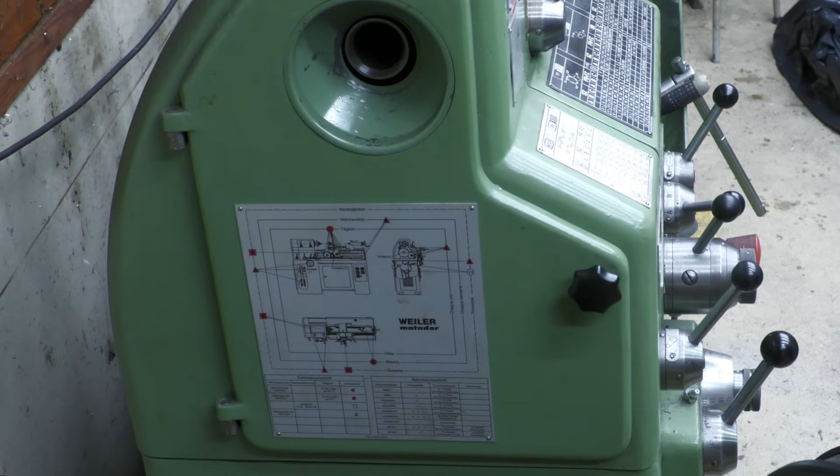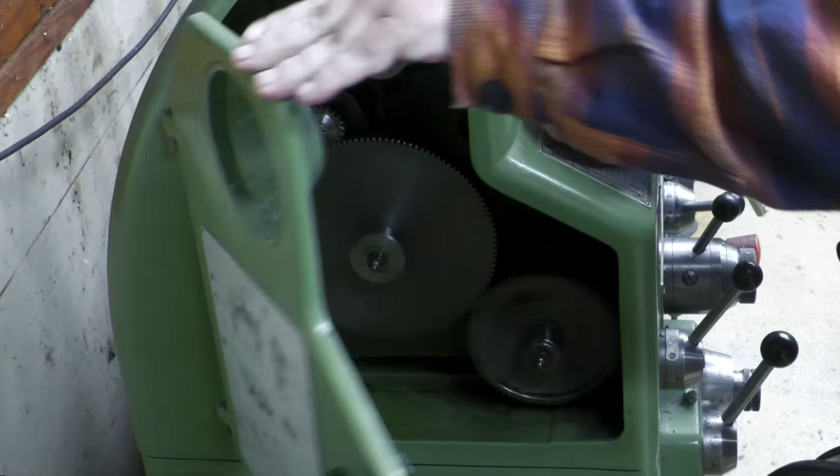Now, let's take a look inside the guts of this lathe. Well, it's a very simple thing. You just turn this knob and then you can open a door. And there you have it.

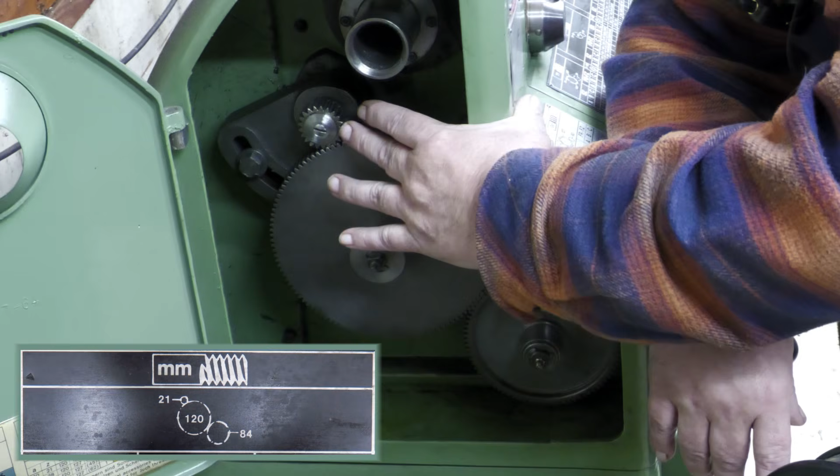At the moment we have here a gear which is 84 teeth, and this is 120, and this one is 21 teeth. And as you can see in this table here, there is a table down there, we should have 28 teeth gear here up, which I have here, and then we should have here 72 teeth gear, which I have here.

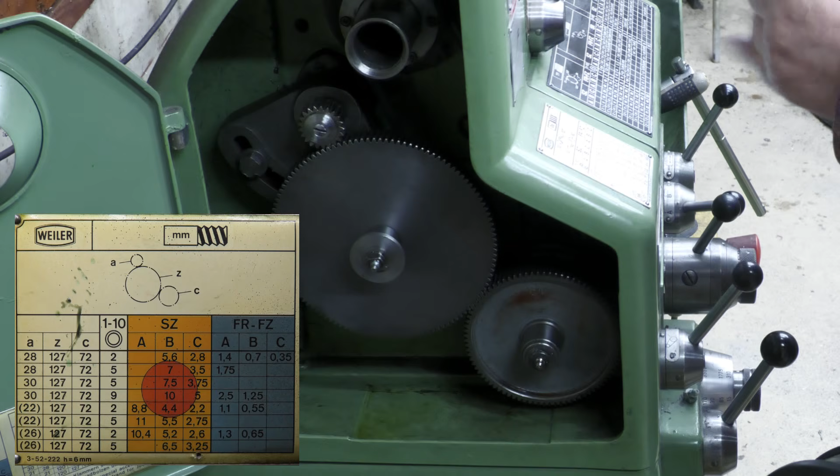So, and yes, this I bought. It was, the gear was ready, but the hole was not - it was 16 millimeters. I had to bore it to 22 millimeters. It didn't have a keyway, and now it does.

Okay. So, the first thing, of course, is to try to start to remove these things. And in order to get this right, I believe I need to... no, I don't need to remove this, only that one here. So, let's see now. So, there is a screw.

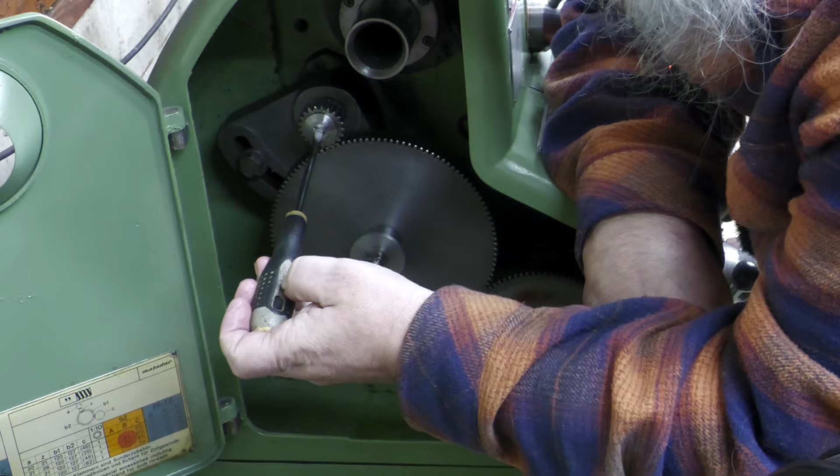But this thing, this one, there is a surprise inside. There is a fuse, and you should be really careful when you are dealing with this one, not to drop anything to the floor, for example.

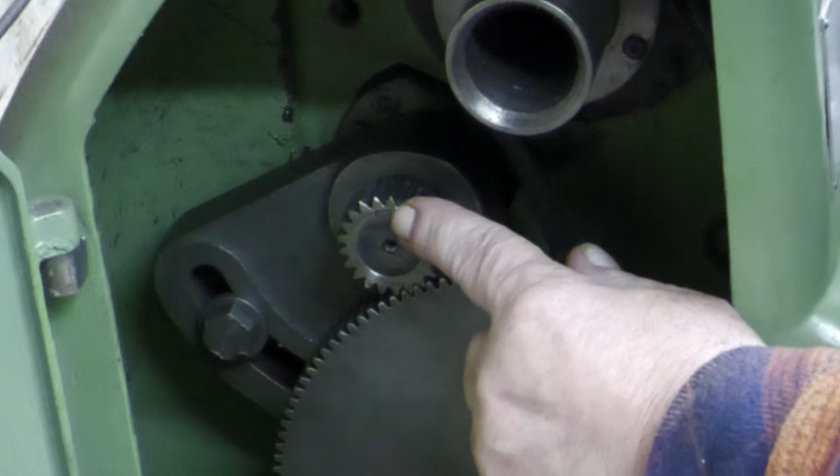Okay, and now I should also have, yeah, I wipe these clean as I go. There is a keyway. If you look carefully, you might see it. And now if I pull this gear out from here, it stays up.

And this is of course the wrong gear. This is the 21 tooth gear, which I don't need. I need a 28 tooth gear here. So, but the key here is very, very special.

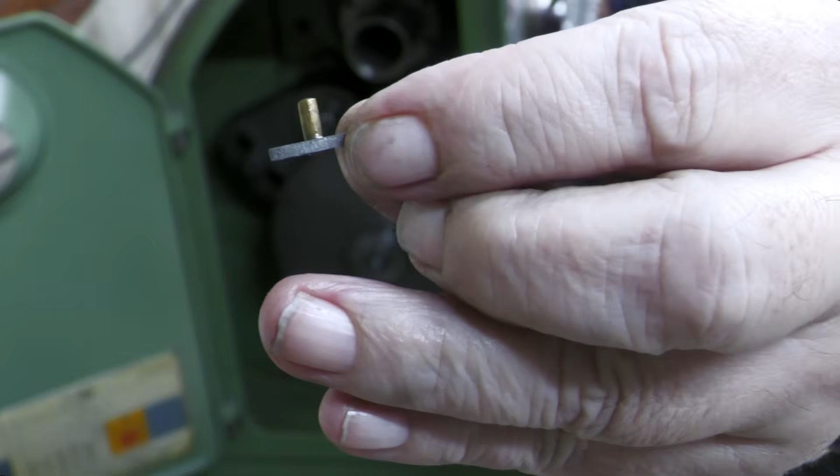When you remove it like this, you probably notice - I will show it nearer to the camera so that you can see - there is this little thing poking off. It's made of brass, and this is actually a fuse. You should be careful, this is very easy to drop off that one. So now we have like this.

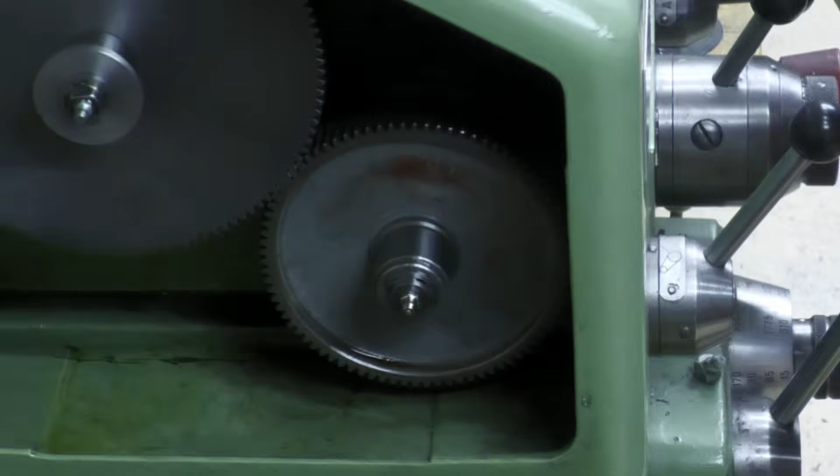And we should also change that one. So we need to take away - there is a C-clip here.

This should come out quite easily. Yeah, they come out easily. You just have to be careful so they don't fly around when they pop off. Okay, it's out.

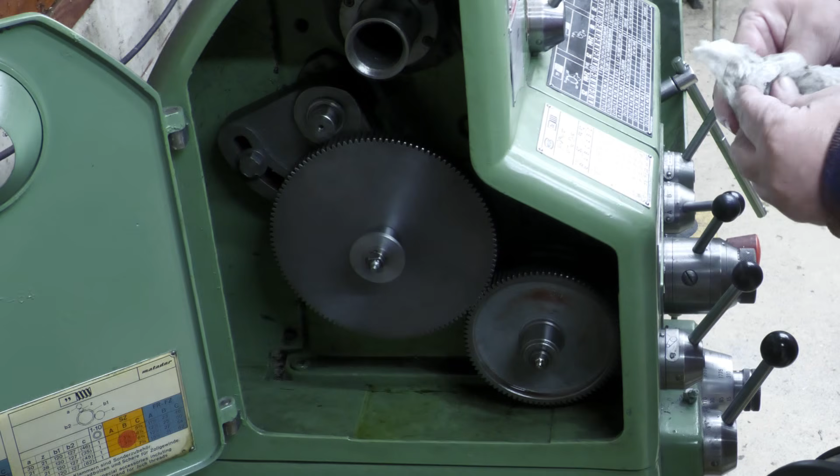And next bit is this. Okay, it came out like this. There is this clutch in the backside.

These 3 pins, they go there somewhere, and these should be that one. I need to clean it up. Now I need to change that gear as well, and I'm just wondering how to get it all out from here.

Okay. Yeah, that should be okay. Yeah, now it came out. This is really, there is a key here, and this one. And then we need to push it away from there, like that.

And now let's pray that my new gear fits here perfectly. This is always a surprise. It should, but you never know. This is a tight fit, really tight.

And this is really fiddly. It doesn't want to go easily at all. After some filing and especially chamfering those keyway things, I got it now there, and it goes.

You should not use force at all here. You just put it there, and it should go. And well, I took it out, and now I apparently cannot put it back. Oh man, this is horrific.

But I also found out that it's better to put the upside first and then sort of put it there, like, now it doesn't want to go at all. Of course it doesn't.

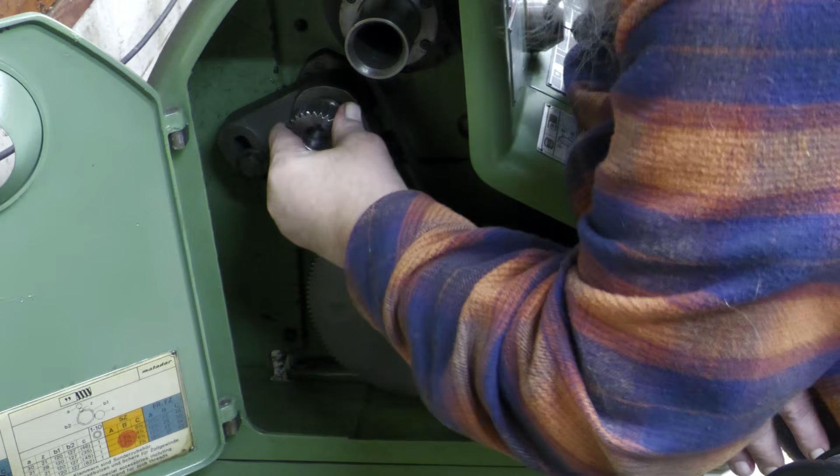And yes, these parts must be really clean. Now it goes. It feels like that. And it's definitely the key. It's dangling out there somehow. Okay, now it's straight.

Man, this is really one of a kind. Thank you, Weiler, for this thing. Okay, now it went. Wow. Oh, what a mess. And then I just put this back with the screw here.

Like here. Without dropping anything. So that is now the 28 tooth gear here.

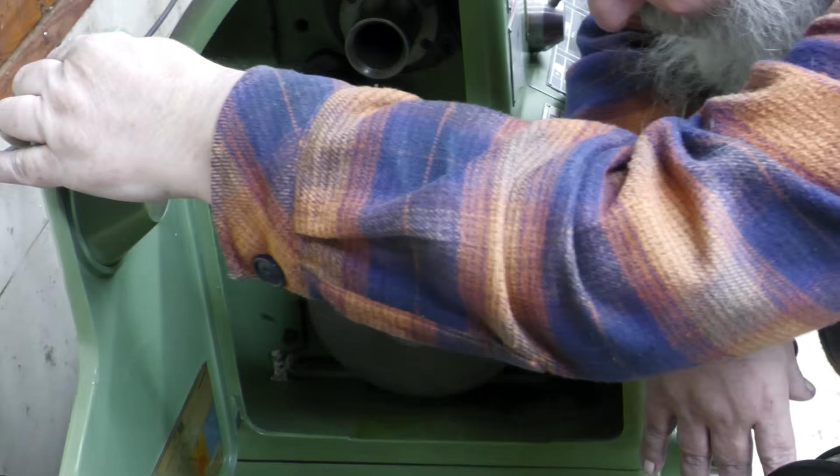And yeah, there is this secret inside there. Well, okay. There is some backlash, like always there. These usually have some, and this has quite a lot.

But yeah, and next thing is to put this into that, and let's see how easy it is. This is a 10mm tool.

Sorry, I probably will block your camera view here because oh man, this is... oh, there you are. Now let's put this on free gear.

Yeah, well, the nice thing here is that once you get it there, you just tighten it tight, and then it...

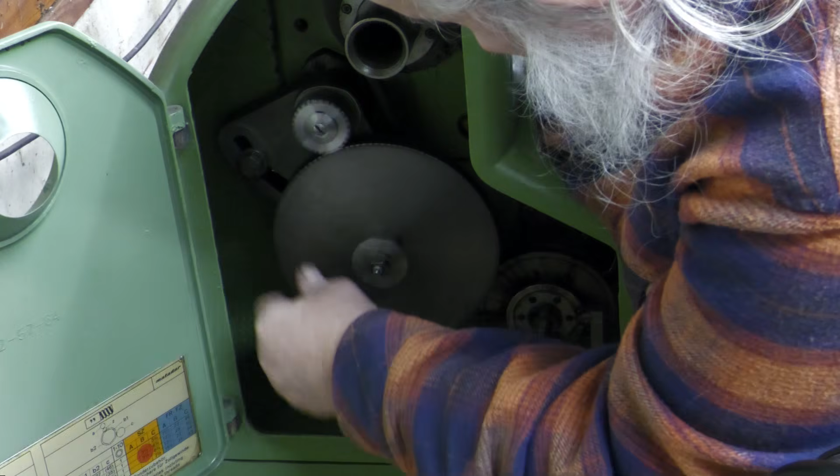Well, it's okay. And now this whole bayonet thing can be loosened here, because now we need to put the other gear in here.

This one goes into here. And of course it's also, yeah, okay. Okay, there you are. And then we should have this there, and then that one, little C-clip there.

Oh, these are always one of a kind things. I don't know how to put them back so that you don't damage yourself. That way. Oh, it went quite easily this time.

Now, this whole thing goes to here, like this, and now... oh, I think I succeeded on the first try. There you are.

Gears have been changed. The biggest hurdle was that, which is really, I would say, really cumbersome. But I think they are really good. Okay, let's close the lid.

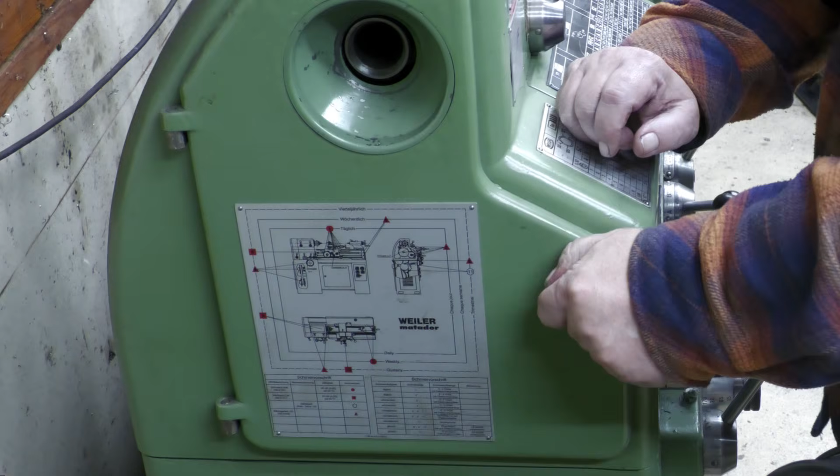So what is the metric thread standard actually? Well, it's an ISO metric thread, also named like that, and it is the most widely used screw thread standard or system in the world. You can find it almost everywhere, even in countries where imperial systems dominate.

Of course, because for example, if a car is manufactured in Japan, then it's exported to USA, well, it has a lot of metric nuts and bolts in it. So they don't make separate imperial cars for USA. Yeah, okay.

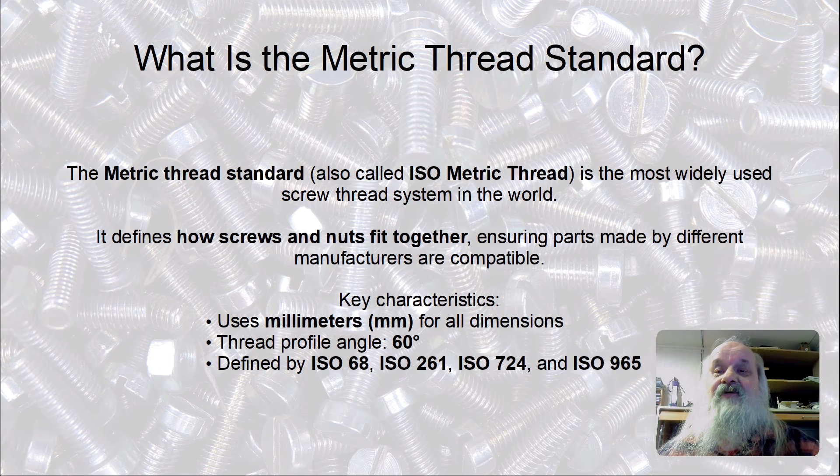So, well, to understand these metric threads, there is some terminology, and this coincides quite a lot with imperial threads also. There is a thing called nominal diameter. It is the diameter which you can measure on the outside of the bolt with calipers. If it reads a little bit below 10 millimeters, it might be an M10 bolt. But actually this is not a reliable way of doing this. You should also measure the thread pitch, which is the next thing.

In imperial threads you define the pitch by so many threads per measure unit, and the measure unit in this case is inch. So for example 8 threads per inch. But in metric threads you define the distance between thread peaks. So for example M10 thread, the distance is 1.5 millimeters, thus it will be M10 x 1.5. As simple as that.

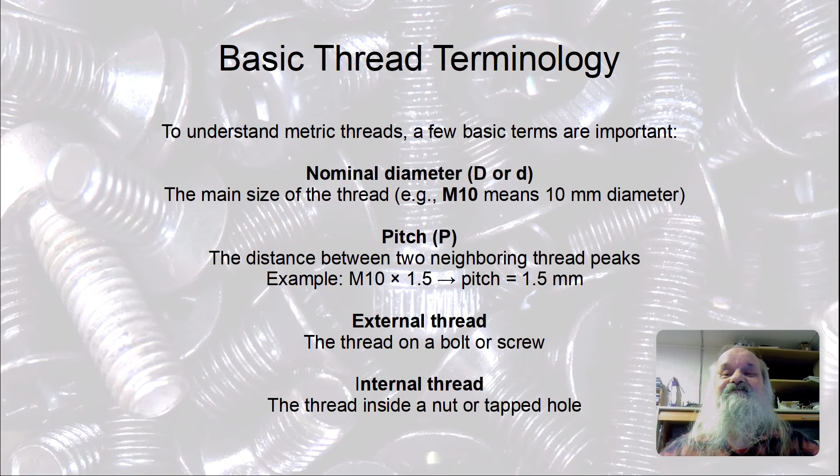And then we might have the tolerance class. The most usual tolerance class is 6g for bolts and so on, and 6H for internal threads like nuts. And if you omit the pitch and also the tolerance class, for example, you say that this is an M10 bolt, it means that it's M10 and it's a standard coarse pitch with 6g tolerance class. So those are the default values, so to say.

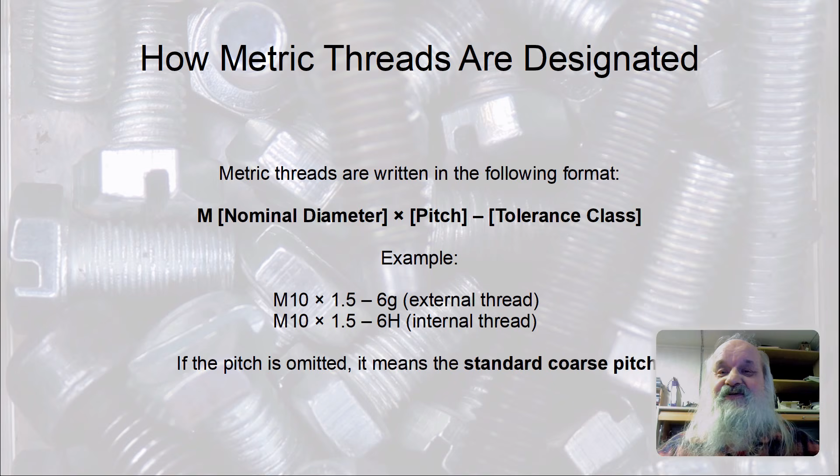And now the thread geometry and shape. As I think I already said, but I'll say it again: it's a triangular profile, and the included angle is 60 degrees. Period. And then it has some flats on top and bottom, root and top of threads. Especially the root has a flat in there, because sharp corners create stress points. And now if it is rounded or there is a flat, it makes the bolt more robust. It takes more load. It doesn't break so easily.

And then we have some important diameters, which are major diameter. This is the diameter, as I said, you can measure on the outside of a bolt with a caliper, for example. Then we have a pitch diameter, which is not easily measurable. It's the so-called pitch diameter, which is in between the peak and the groove's root, somewhere in between there. Then we have the minor diameter, which is the smallest diameter of the bolt and the largest diameter of the nut... the smallest diameter of the nut as well.

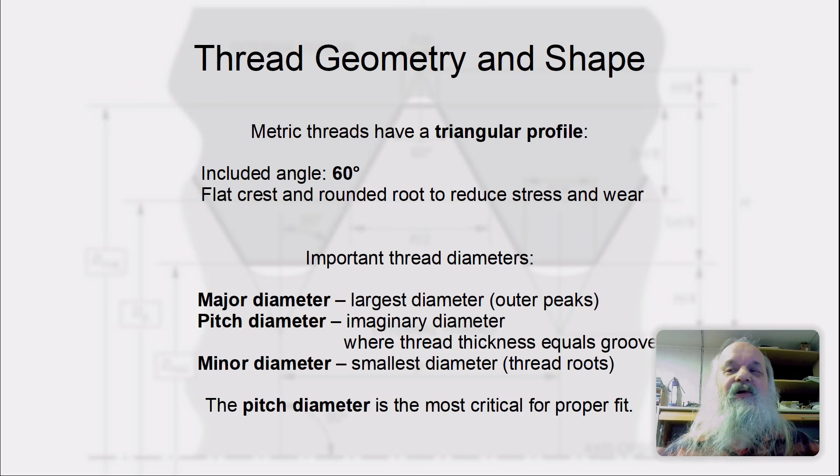And however hard it is to measure, the pitch diameter is the diameter that is most critical for a proper fit. This is the reason why when you are single point threading, for example, you try it with a nut, because it's not very easy to measure it. So it's sort of... you try it out.

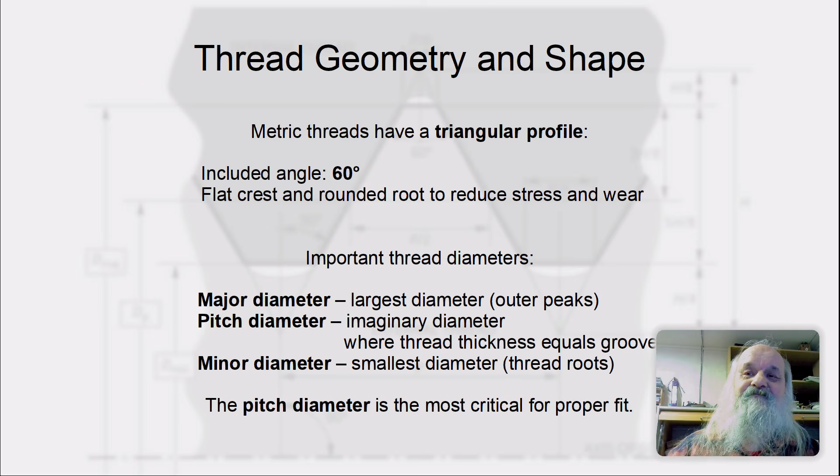Okay, and here are some images to support this what I was talking about. You can see the flats there on top and bottom of the threads, etc. You can also see how the pitch is defined here, and so on. This picture was taken from Wikipedia, which is probably the most useful site when you are trying to understand metric threads.

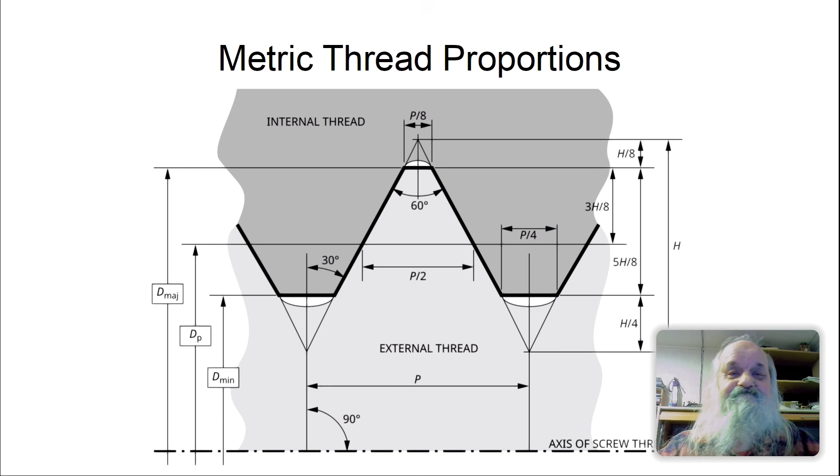Then there is another aspect on threads, and this is not only for metric threads, this is also for imperial threads. This is tolerances. And why are tolerances needed? Because it's impossible to create a perfect nut or a perfect screw. You always have some deviation in the dimensions. So tolerances are used to make the parts fit together easily.

And there are several tolerance classes, and they define or control how tight or loose the fit is. If it rattles, it's a loose fit, and if it doesn't screw in when there is a hint of dirt, then it's a tight fit. So the optimal is somewhere there in between.

Then they define how accurately they are manufactured. When you create a thread, you put the thread in between some tolerances. And if the tolerance is really tight, the assembly becomes a nightmare. For example, if you have a tight thread with outer diameter like 60 millimeters, and the bolt you try to screw in is a lot warmer than the nut, thermal expansion could make it so that it won't screw in.

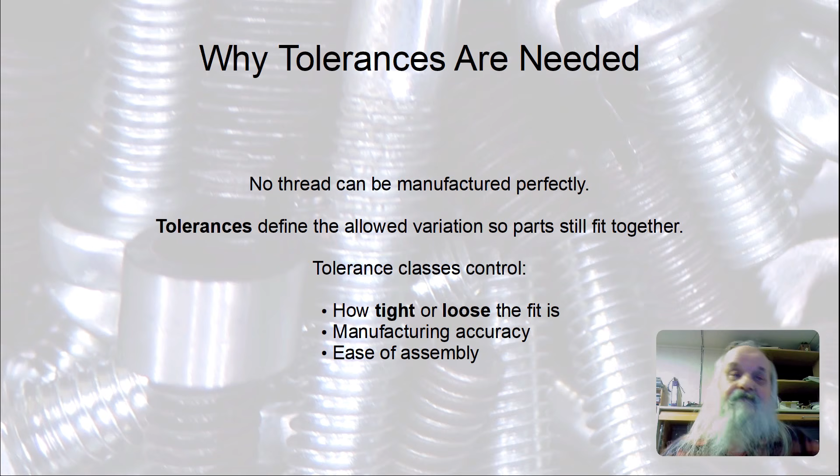So what are these tolerance classes? We have a few of them, but the most used are the 6g and 6H tolerance classes. The tolerance class consists of two elements: the tolerance grade, which is a number, and the tolerance position, which is a letter. The tolerance grade tells how wide the measurement range is allowed and still be in that tolerance. The position means which side, bigger or smaller or something in between.

So, since 6 is the tolerance grade we chose, it's indicating a medium tolerance. It balances between easy assembly and good strength. If the tolerance is very loose, it impacts the strength of the system. Tolerance grade 6 is what you get if you go to a hardware store and buy a bolt, the tolerance is usually 6.

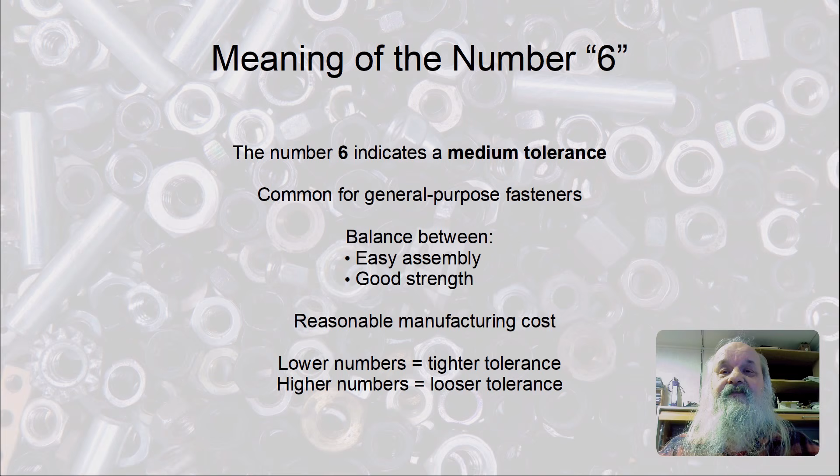And then this g means that it makes it undersize, below the nominal size. So it can be a little bit lower than the nominal size, and how much lower is defined by the tolerance grade. If it were 9g, it could be loose or tight or whatever. But 6g is a good trade between good fit and strength. g usually means it's a bolt, and this tolerance means the bolts can be made a little bit smaller than the nominal size.

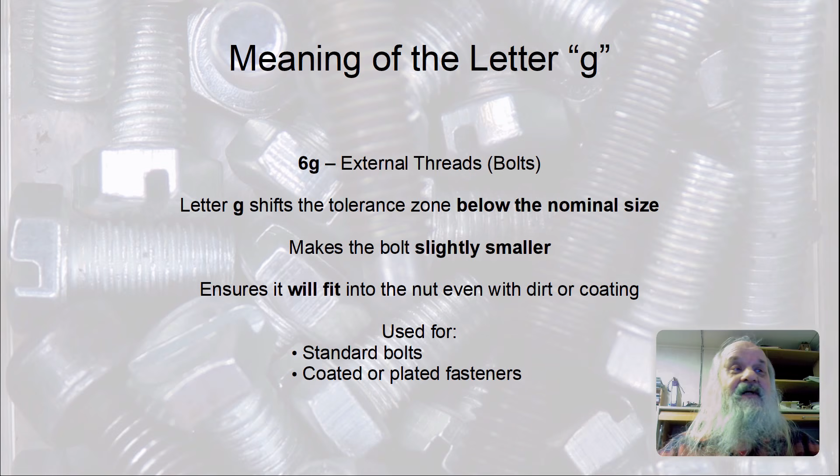And it is such that this 6g fits with the corresponding nut even when there is some dirt or coating, for example zinc. As said, these are widely available in hardware stores. The grade for bolts is usually 6g.

And then this capital H, it's the same thing for nut internal threads. This means that when this tolerance is applied, it makes the things larger. It starts from the nominal size, and then it can be a little bit larger than that, growing from the fundamental size. And this produces a clean and accurate internal thread.

Again, 6H is used in standard nuts and tapped holes in machine parts. When you buy a tap, in Finland you cannot buy taps from hardware stores. There are special places where you can buy those, at least if you want a good quality one. So the taps are usually graded 6H tolerance.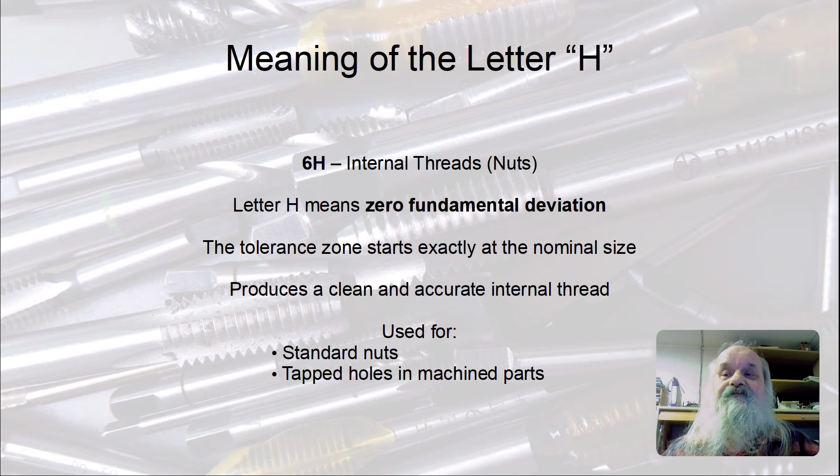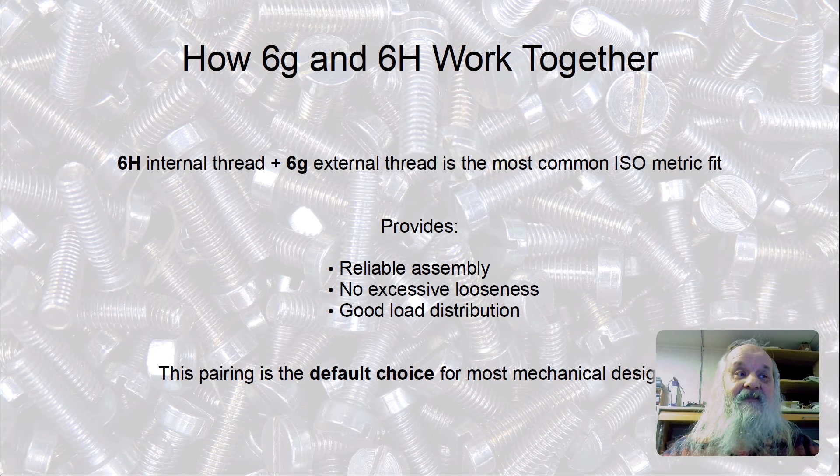And then, of course, you have 6G bolt, 6H nut. This is the very usual combination you have, 6H and 6G. This provides a reliable assembly, so you can screw it in easily, and there is still no excessive looseness. It provides good load distribution, and this is also the default choice when designing mechanical things.

Sometimes you need to have a little bit tighter tolerances. For example, measuring instruments need to have that, and some steering components for cars also need tighter tolerances. For example, in a micrometer we have a very fine screw, and this one has very tight tolerances, I believe.

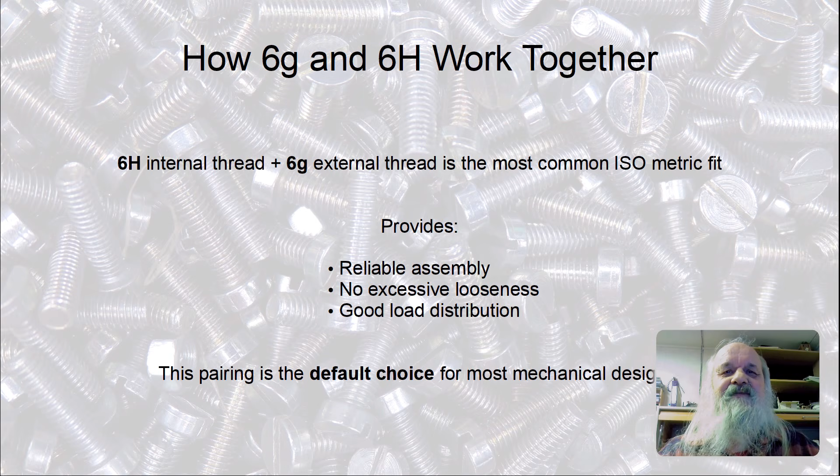So, what we have been discussing in this presentation is about metric threads. They use millimeters and a 60-degree profile, that's the thing that they are. Dimensions are calculated or derived from nominal diameter and pitch, period. 6G is used for external threads like bolts, and 6H is used for internal threads like nuts. Together these two tolerance classes provide a standard, reliable fit.

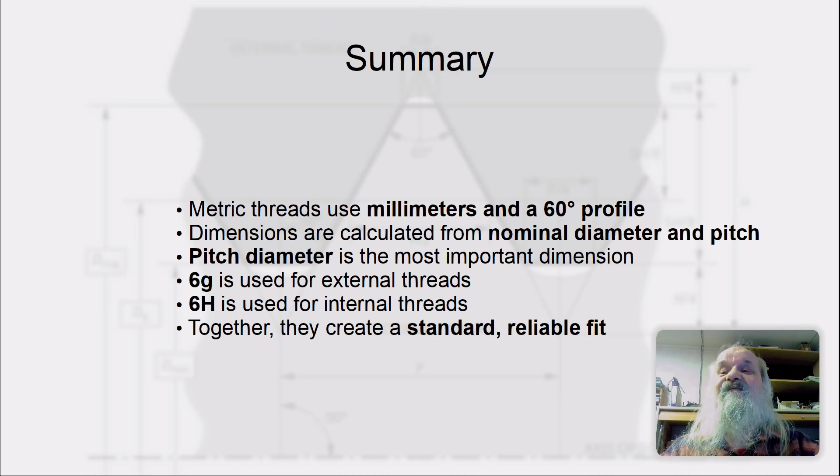Of course, my presentation was not complete. I present you here a very good site where to start if you want to dig into this subject - please visit this Wikipedia page. It's really, really good, contains a lot of links you can follow, and it has a lot of information concentrated in one page. This is the place where I have read most of the information I have been sharing with you.

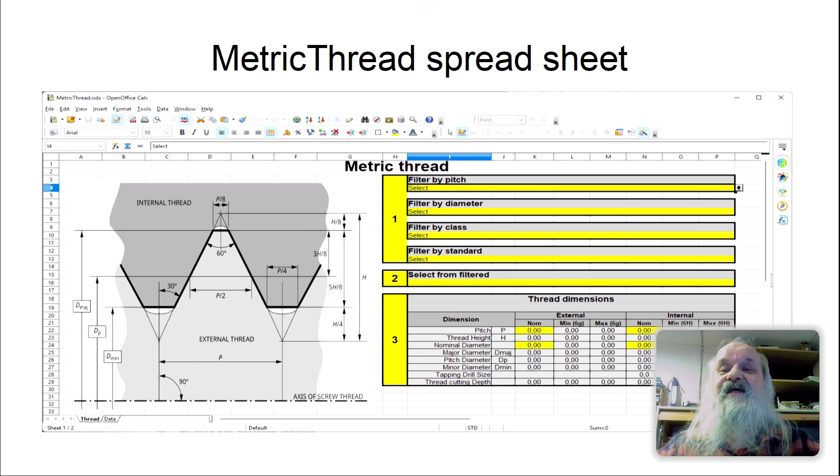Then, just right after this presentation, I will present you a tool I have made. This is actually an Excel sheet which calculates thread parameters for you for machining - more about that after this presentation. So, okay, now this quite lengthy presentation is over. It took over 22 minutes even - man, a lot of talking for me.

Okay, so next, let's go to the Excel sheet I have made for this thing. Here is the Excel I have made. You can open this - well, it's not Excel, it's actually created with OpenOffice, but you can also open this with LibreOffice Calc. It works well with both programs.

This Excel sheet - I will call it Excel sheet because I'm used to that word - uses macros, and for that reason you have to enable your macros in here, in options. You go to security and macro security. Usually in these programs the macros are disabled, so I have put it to medium.

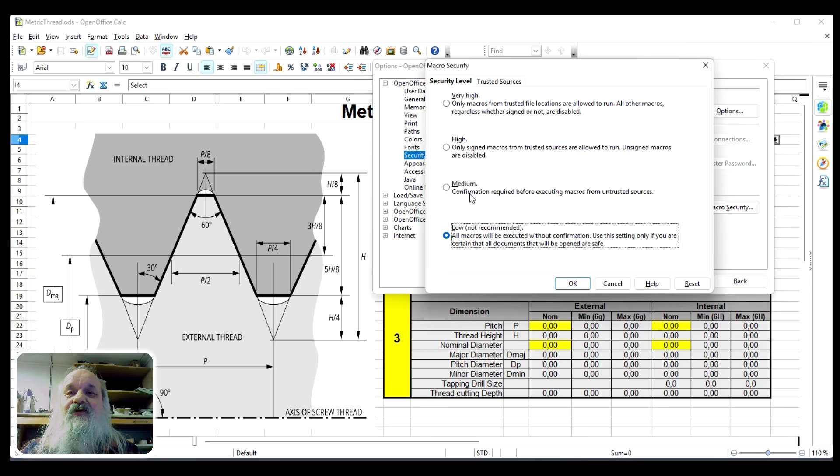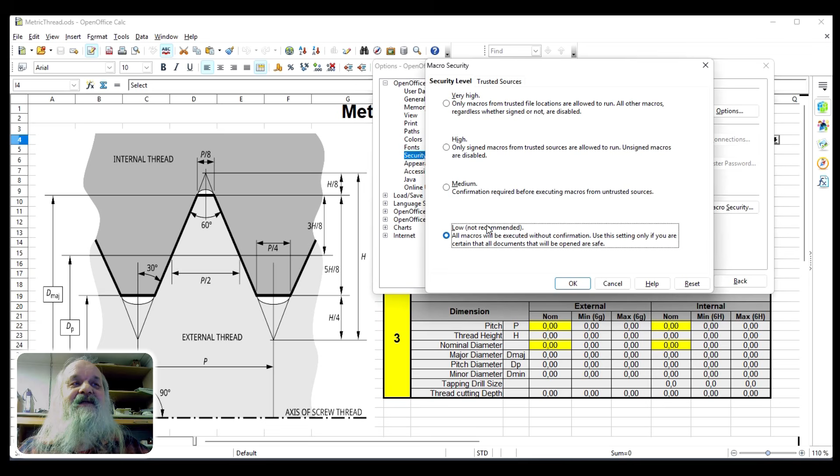Then it will ask you whether you can run this macro. I don't know whether it asks every time. With high, I would need to sign my macros, and I don't know how to sign them. Very high means it doesn't run the macros at all, and this is actually the default setting. You need to change this to either high, medium, or low in order to run this Excel.

So, what does this do? Well, first of all, it has a list of data in this. There you can see we have a lot of different threads here. These are standard threads, defined by diameter, pitch, and classification fine.

Then there is an alternative fine and coarse. And then we have some standards like ISO 262, which is the normal metric standard thread. Then we have an old DIN 13, which is also a metric thread, but it's obsolete. And then Japanese Industrial Standard - this is something very special, you might stumble into those sometimes.

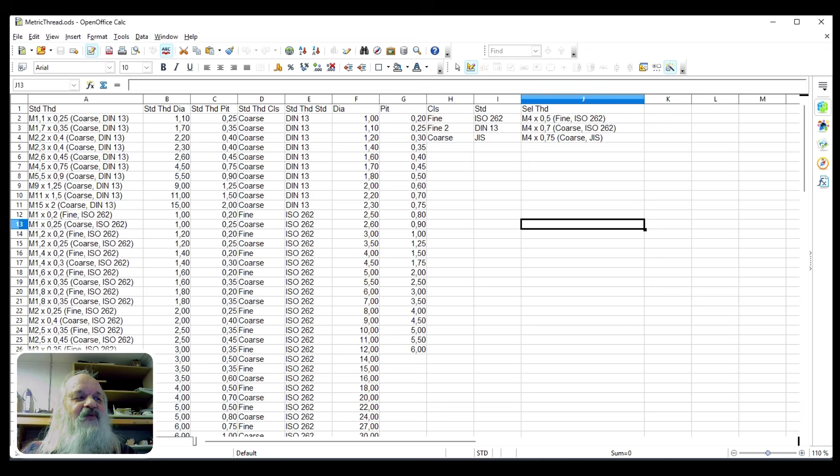So, you could use this table as such, but it's very cumbersome and not very easy to use. So let's go back to this one - there is a nice picture which I have stolen from Wikipedia, and it defines all the different parts of the thread, etc.

And then this part here, the rightmost, we have numbers like 1, 2, and 3. These are like: first you should do this, then you should do this, and lastly you should do this.

But actually, you can feed in thread dimensions also totally manually. For example, let's put here 1 millimeter - that's the pitch. And let's say it's like 9 millimeter nominal diameter. Now it calculates the external thread parameters here. You can also put the same values here on the other side - 9. So these are like internal parameters, and you have here nominal diameter, major diameter, pitch diameter, and minor diameter.

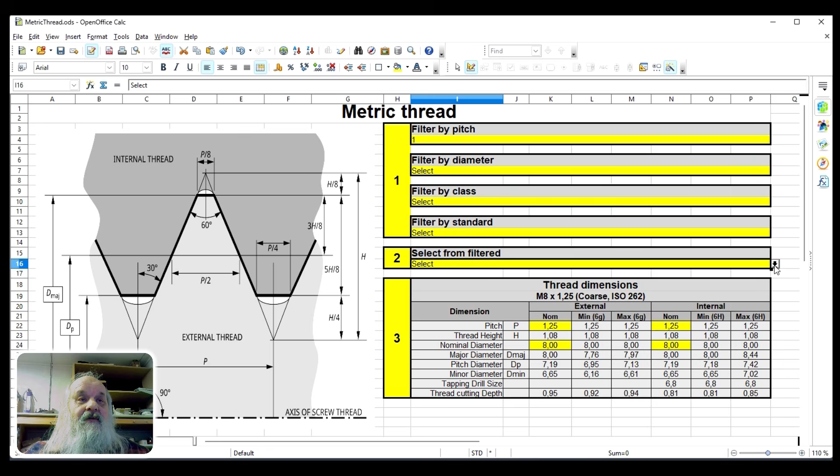It also has these 6g and 6H tolerance, minimum and maximum - this is actually quite usable when you do something like with this. And then you can filter by pitch. For example, we can see which threads we get if we select 1 millimeter pitch - so we have M6, M7, M8, M10 available with this pitch.

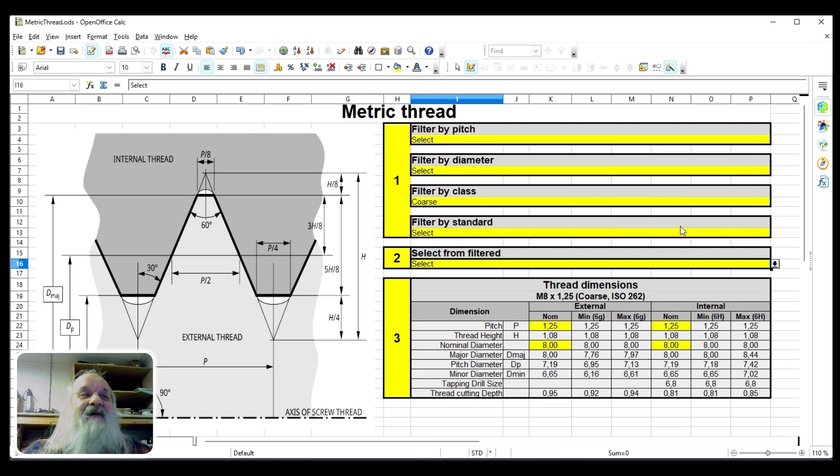And then we have a class here - this is not the tolerance class, this is different, this is fine. For example, we can take all coarse threads here, and then let's see - we have all coarse threads here, and it becomes a long list. But how would I use this if I want to identify a thread?

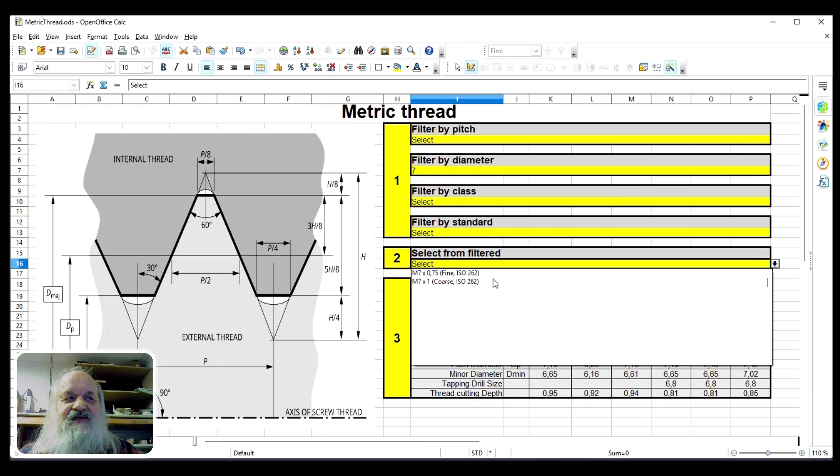So I would take my calipers, measure the outside. Okay, it says 7 millimeters. Let's see, 7 millimeters. Here in the list, we might have 7 - yeah, there is a 7. And then I know which standard threads are available for that one. So 2 are available. Yeah, it's actually fine, M7 is available.

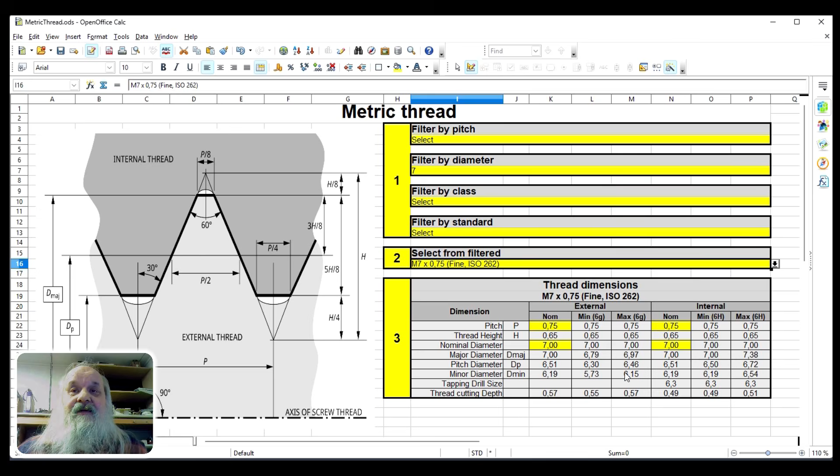Okay, that's it, that's about this. You can figure out yourself how to use this. And of course this...

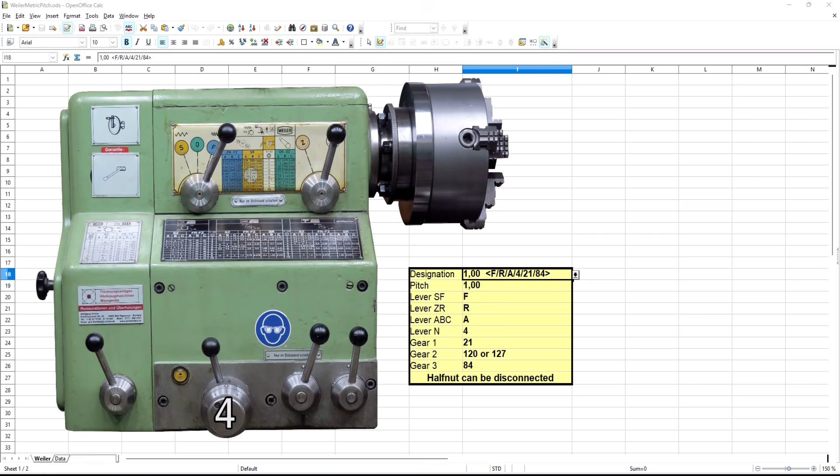Okay, well, I have one more Excel for you, and this is a graphical representation of Weiler pitch settings. And well, this is also very Weiler specific, and especially Weiler Matador specific, so you won't be able to use this with any other lathe than that.

But sometimes the plates, like here, this top plate which contains all the pitch settings, they have vanished or are a little bit damaged so that they are partly or totally unreadable. So therefore this might be useful for you if you have a Weiler lathe.

So how this works - this doesn't get any simpler than this. First, you choose the pitch you want to cut. So you have here a list of pitches, it's a very long list actually. This lathe can do quite many different pitches, especially if you change the gears in the back.

So then you get, I believe, all the pitches for this metric ISO standard. Let's choose one - I had here chosen one, and you probably can see that for 1 millimeter we have two: one has F, Z, etc. This is because when this SF lever is in the F position, then this ZR lever can be either Z or R position. The only difference is the speed, how fast your blade is moving. So you can choose one of those.

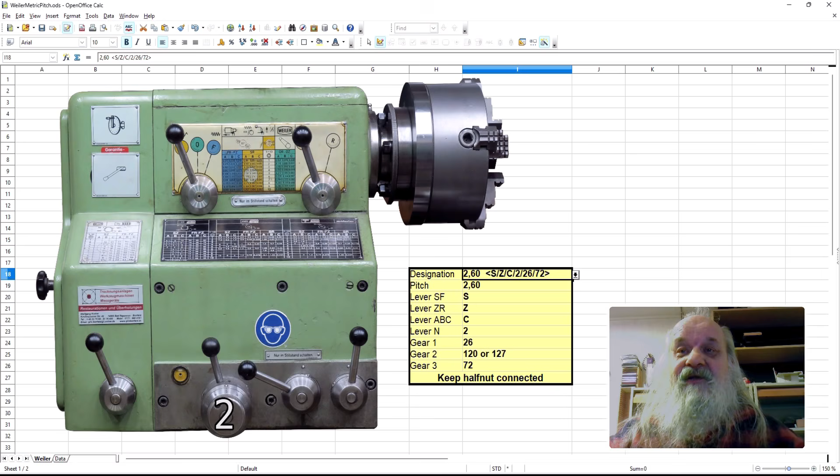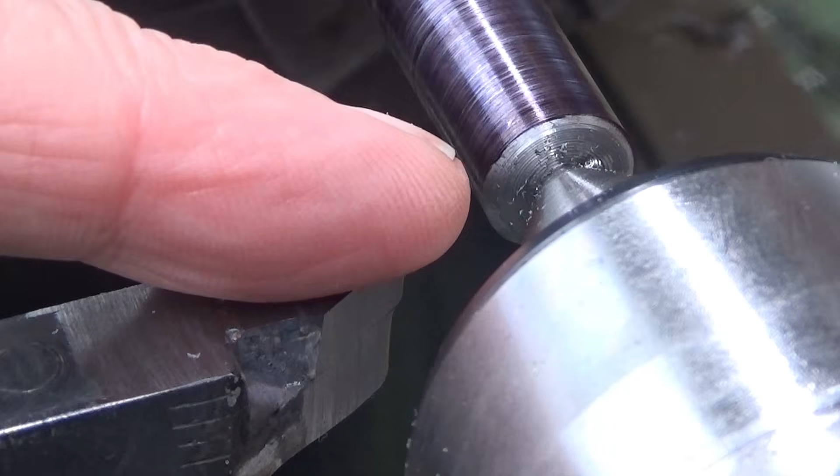So now, this is the moment of truth. This workpiece I have turned down to 11.97 millimeters, so it should be very suitable for threading M12 times 1.75 millimeter thread. So now let's take a 0.1 millimeter cut, and now I push the thread.

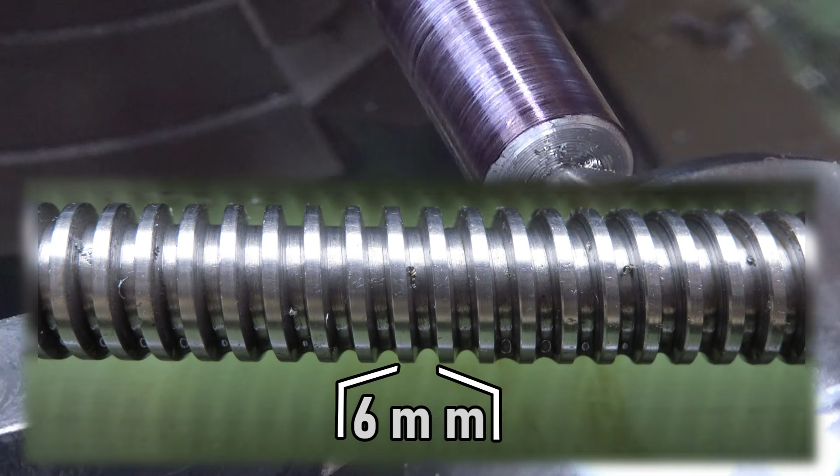Oh yes, the 6 millimeters, which was the pitch of my lead screw, is not divisible by 1.75. I cannot disengage the half nut, and I'm running this really slowly, so this is now the first pass ever, and it will be a scratch pass.

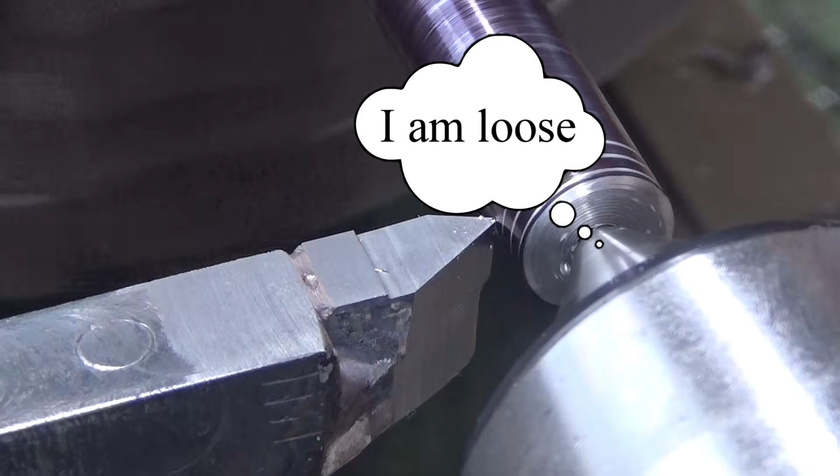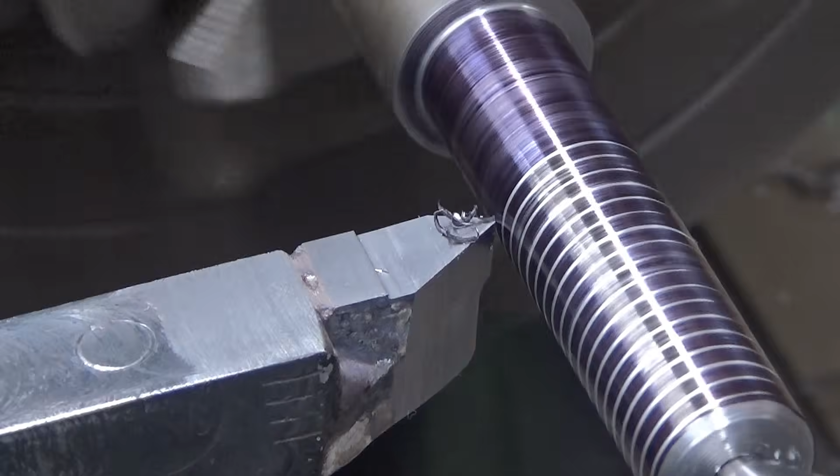Seems like it's not totally concentric, my thing. And this is actually very nice. Let's turn it like that. And now, this is the thread gauge. It matches really, so the thread pitch is correct. And now we have to go back.

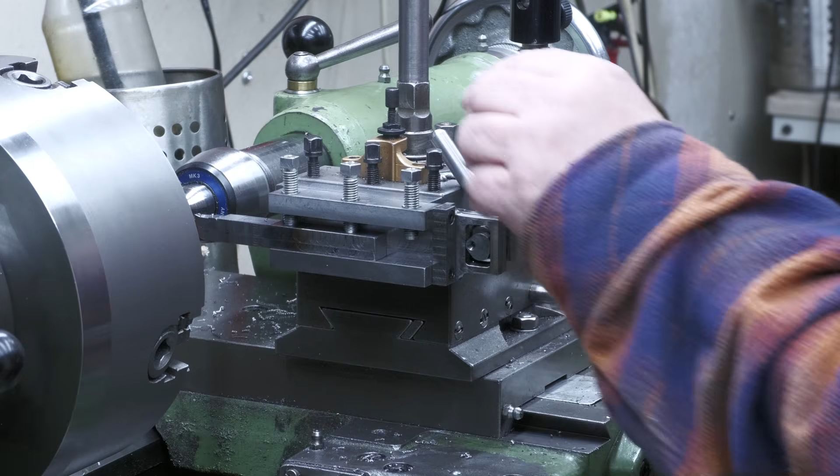And I will put some cutting oil into that one as well. There you are, I think. Yes. And let's go to 0.5 millimeter right away. This should work quite well.

Well, this is actually quite fun. And now the nice thing here is that I don't need to take care of the dials and remember what was the depth of cut the last time. Let's see if it is -- it is, there you go. And now let's go to, well, 1 millimeter.

This tool is rigid enough. It's really rigid. No trouble at all cutting this.

Next will be 1.25 millimeters. Yes, let's go. Oh, yaha, when it has load, it jams, okay? That I must now consider. It was really hard to get out.

Okay, maybe a scratch pass now. It seems to be really -- yeah, this -- it somehow changed a little bit, tighter for some reason, I don't know why. So probably the tolerances in this one are a little bit too tight.

So I need to do something for those, maybe. Why is it so tight? Okay, wow, it is tight. So I take 0.1 millimeters now. Well, it becomes looser and looser all the time. It's a loser. This needs some practice, I believe. And now let's take 0.1 millimeter again.

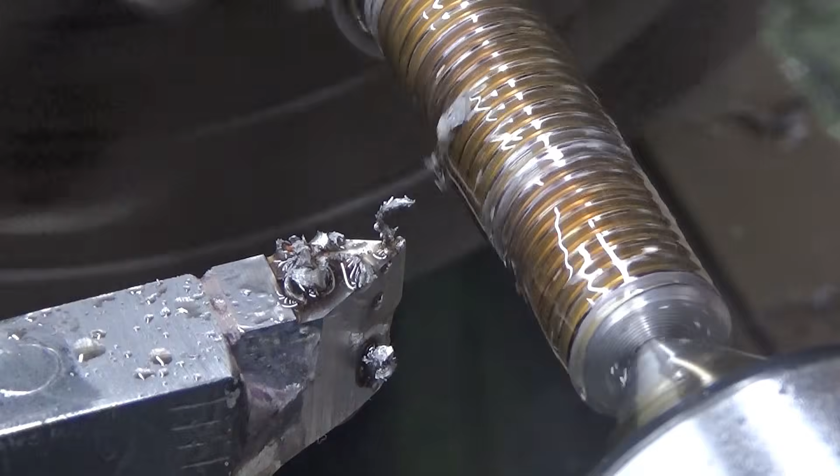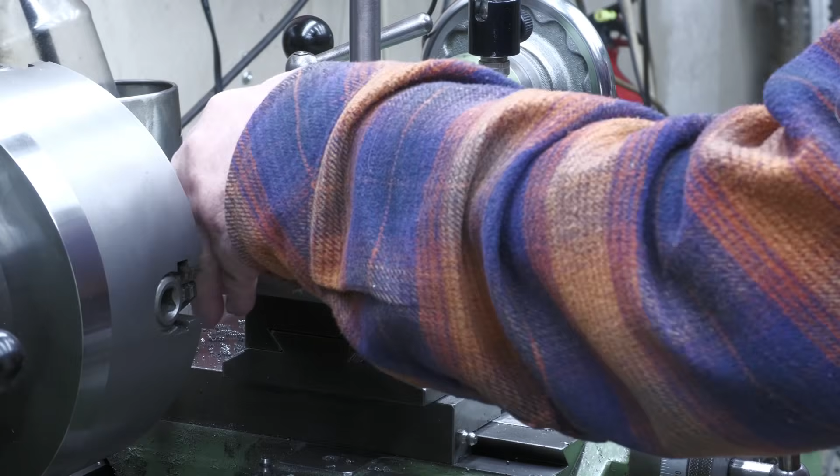It doesn't look tidy. Oh yeah. But the rigidity is there, it's really rigid. 0.1 millimeter more, and there we go. But there is no rigidity issues, which is really good. There you go.

Let's see. I'll take this away and see how our -- yeah, this is really a spring pass now. Maybe one more spring pass. Spring pass. Let's take a little bit. I almost disconnected the half nut.

I'll take 500 more here, just for a good measure. This is by no means a perfect thing now. It becomes perfect when I know, when I catch why it is so tight at places. And this is definitely now the last one.

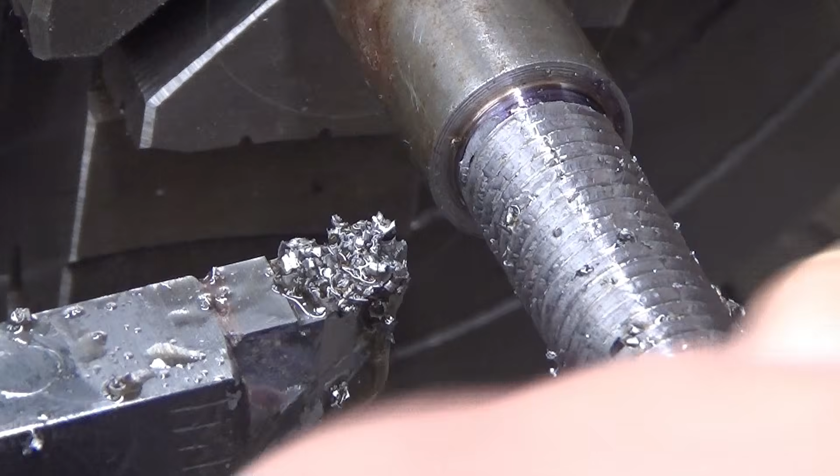Should I actually try it? There is the file.

Yeah, it was all it needed. Now it's really tight -- not tight, but yeah, there you are. A rusty nut goes into a clean one, and there is some debris. Yeah, well.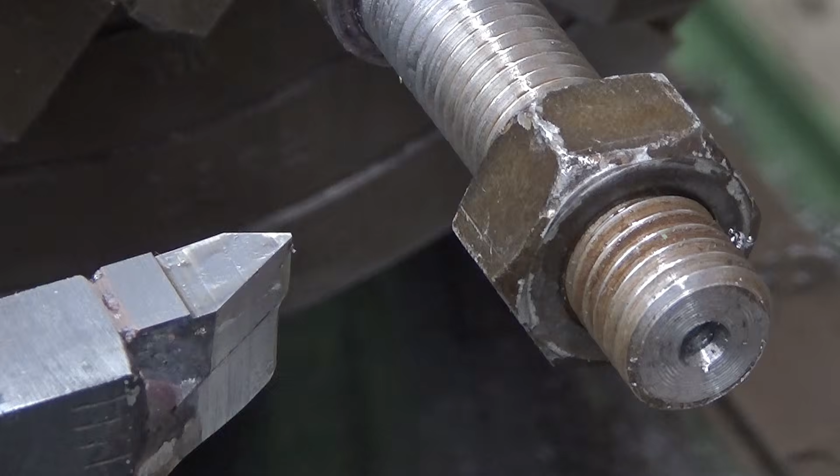It's a good fit, really good. It doesn't wobble at all. That's now the conclusion here. This tool is okay, but it has some difficulties with -- I don't know what. I believe it is gripping on the underside there. There seems to be something.

Yeah, it is not the dovetail that is causing the trouble, because it would be causing it here as well, but it is there underneath. But I can fix that, that's easy to fix. Take it out and just file away from this workpiece. This should be easy to do. Let's see what we are going to do the next time. Okay, till the next time, bye!

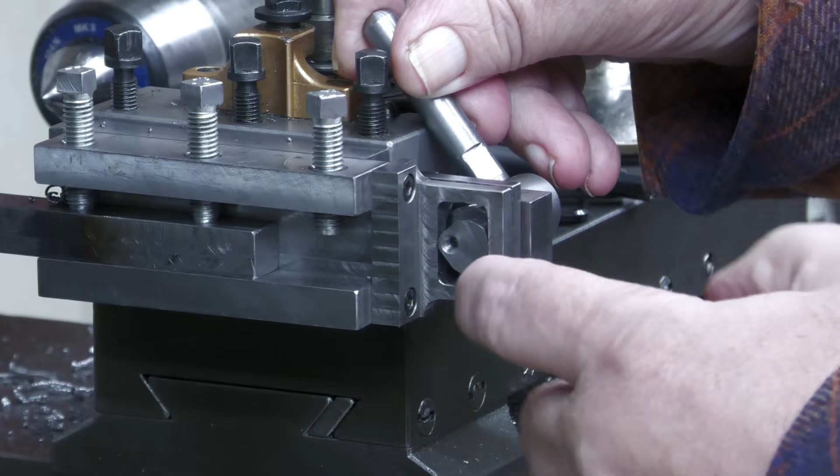Some epilogue here now. Well, actually, now it works all right. It was not the dovetail issue, it was actually here underneath. This eccentric was scraping here underneath, and it left a clear mark where it was scraping, so it was very easy to file that part away. Now it's probably a perfect tool.

Probably. Well, yeah, it needs -- there is a learning curve with this one, yes. But it eases in a way that it's easier. You don't need to remember the previous depth of cut, so you can progress very easily and do spring passes really easily. Because you don't need to use the dials to retract the tool, but you can use this one, so you can leave the dials alone. That's a very good thing. Okay, now bye, till the next time.